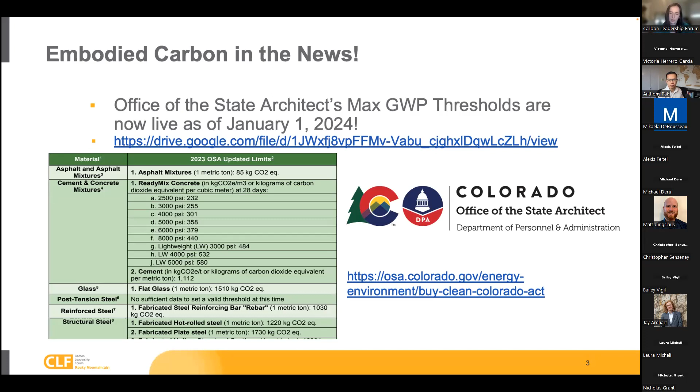So some exciting embodied carbon news in our area. The Office of the State Architect announced on January 1st, 2024, the max global warming potential thresholds. So the Buy Clean Colorado Act applies to state public projects where the project cost exceeds $500,000 and where an agency of government issues a design solicitation on or after January 1st. And so on the left, you can see just a brief snapshot of what the limits thresholds look like. And please use the links provided on this slide to learn more about that.

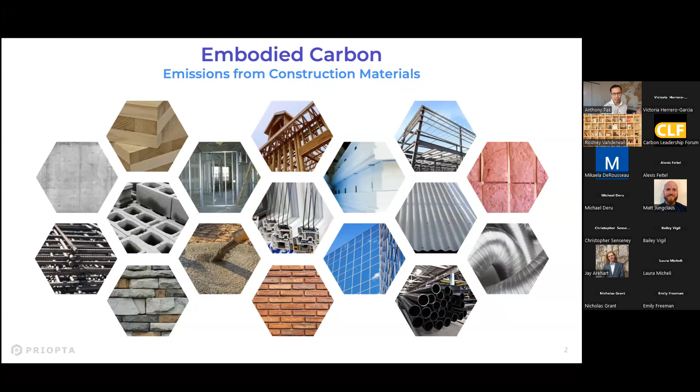Probably most of you are familiar with this, but I just always like to start off with, what is embodied carbon? When we're talking about embodied carbon, we're referring to the emissions associated with construction materials. So all the materials that go into a building or an infrastructure. So things like wood, concrete, glass, steel, the emissions associated with those materials across all the life cycle stages from cradle to grave, so to speak. So everything from raw material extraction, transportation, manufacturing, processing, construction, operation, all the way to end of life for each of those materials.

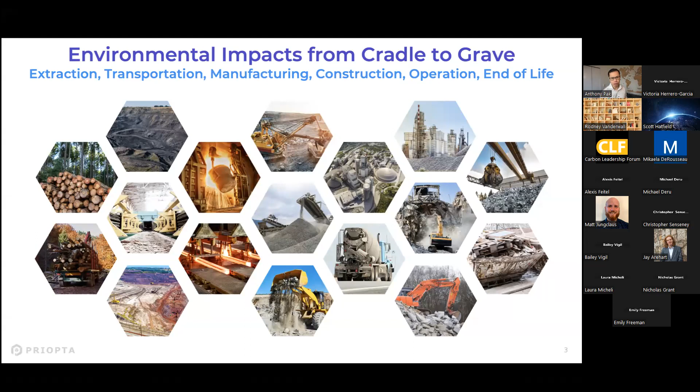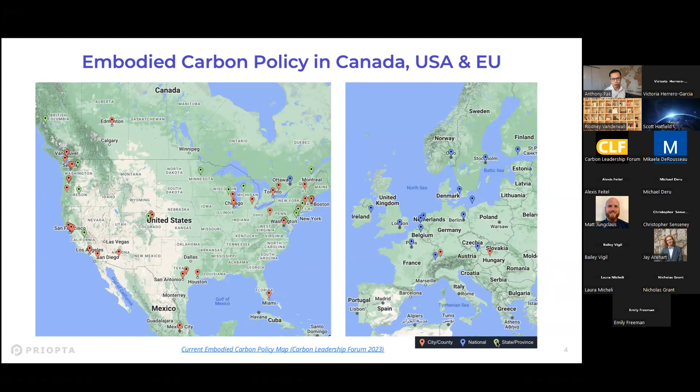In recent years, there's been a lot of interest in embodied carbon from a policy perspective. And so this is a map from the Carbon Leadership Forum that shows you where there are policies and programs addressing embodied carbon, both in North America and also in Europe. So you can kind of see the red dots are the city or municipal level policies, city, county. The blue is national. The green is state and provincial scale. So there's lots of different policies. Just to cover a few of the more prominent examples, the City of Vancouver, which I'll be talking about, we're the first city to put it into the building code. And so I'll obviously be speaking more about that soon.

But also in Canada, the City of Toronto, with their Toronto Green Standard, they have some embodied carbon requirements specifically for municipal buildings. And at a later point, it may apply to more private construction as well, but they've set some upfront embodied carbon limits on that.

At the federal level in Canada, we have the Greening Government strategy from the Treasury Board Secretariat. So this applies to all the federal major new construction projects in Canada. And so currently they have a requirement for a 10% reduction on specifically the concrete for federal projects. And in 2025, they're looking to ramp that up to a 30% reduction in embodied carbon for structural materials, as well as requiring a whole building life cycle assessment disclosure.

At the national level in Canada, there's discussions about putting embodied carbon technical requirements into the national model code in the 2030 code cycle. So in 2030, there's an intention to put embodied carbon into the national code. So that's a fairly significant requirement. But I think right now we're still in the early stages of discussing what those look like.

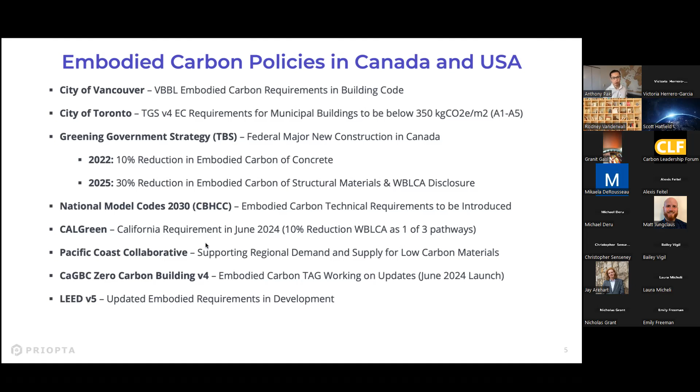So tying back to the City of Vancouver, where did this begin? Well, as of 2017, as part of the City of Vancouver's rezoning requirement, most of the rezoning projects needed to do a whole building life cycle assessment, more just from a reporting perspective. And that was really important to building up industry capacity initially. Rezoning applies to maybe about half of the new construction in the city. So not all the new construction, but still a good chunk of it. And so that really helped to build up the industry capacity to address embodied carbon, to learn about it, and to get used to quantifying this on projects.

And then the city declared a climate emergency and created a Climate Emergency Action Plan. I forget exactly what year it was, maybe 2020 or slightly before then. Within that plan, they defined six big moves, the big areas where we could drive down emissions in the most significant way in the city. And what was notable was that big move number 5 was focused on embodied carbon. At the time, that was a very rare thing to see in climate emergency action plans, or for municipalities to address it, at least in North America.

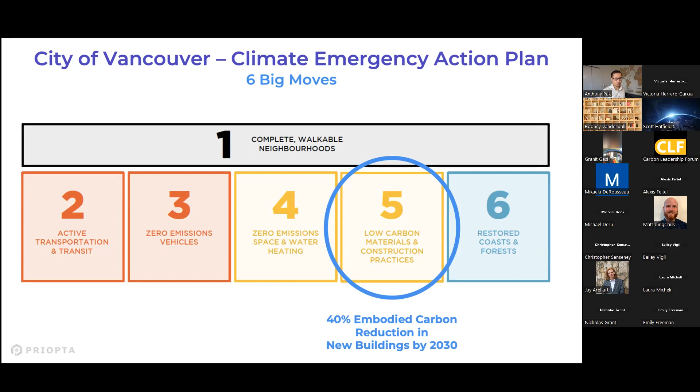And so what they set was that by 2030, they're targeting a 40% reduction in embodied carbon in new buildings, relative to the 2018 baseline. So that's basically where all this policy is moving towards. So what does the roadmap look like right now? As I mentioned earlier, back in 2017, we had the rezoning requirement.

In October 2023, we became the first jurisdiction in North America to put it into the building code, because the City of Vancouver has our own building code, the Vancouver Building Bylaw. This means it applies to all projects applying for building permit that are what we call Part 3 buildings. So they're basically buildings bigger than, let's say, 6,000 square feet, and it excludes one to three storey residential. Anything bigger than that, it applies to those projects in the city.

So as of last October, there was the requirement for reporting, and the embodied carbon on a whole building basis could not be greater than 2x the baseline. So it's got to be less than or equal to 2x the baseline. I'll get more into the specifics of what that means. And then in January 2025, that's when the reduction requirements really start to set in, so between 10 to 20% reduction, depending on the building type.

It's unclear what the interim steps will be between then and 2030, but as you can imagine, it likely will ramp up at some point. And then in 2030, the target is 40% reduction. To get into more of the specifics, so as I mentioned, as of October last year, there's a reporting requirement equal to or less than, and it also needs to be equal to or less than 2x the baseline.

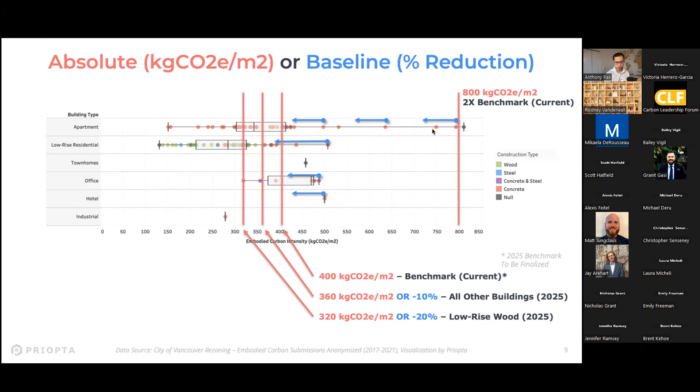So naturally, a lot of questions come into play as to how do you define a baseline and what's included in your study, what building elements are included, et cetera. And so this is where the City of Vancouver's embodied carbon guidelines come into play. And the aim of this guideline is to really address a lot of the potential questions that might come up from a life cycle assessment practitioner as they're doing these types of LCAs.

Historically, there has not been a lot of great guidance, even for LEED projects, like how do you define a baseline? There's a lot of room for interpretation. And so the idea was that we were trying to address a lot of this and give more guidance around how to do this, especially if we're trying to put this into the building code. It's a much higher bar, and I think we need to bring more rigor to this than if it's just kind of a voluntary requirement.

So as I mentioned before, there's an absolute pathway and a baseline pathway. If you go down that baseline pathway of measuring a percent reduction, these guidelines give guidance around that, and some of this guidance will help avoid some of the so-called gaming of the baseline. And then the other thing is, that might include, for example, giving baseline definitions or starting point assumptions that you can use for assemblies or at the material level, even down to what EPDs you should point to when it comes to baseline definition for different materials.

And also giving more details around how do you account for embodied carbon reductions for various different design measures, like what happens when you incorporate reuse or reduce parking, or you reduce the amount of material quantities in your project, or you specify or procure lower carbon materials. How do you quantify that stuff?

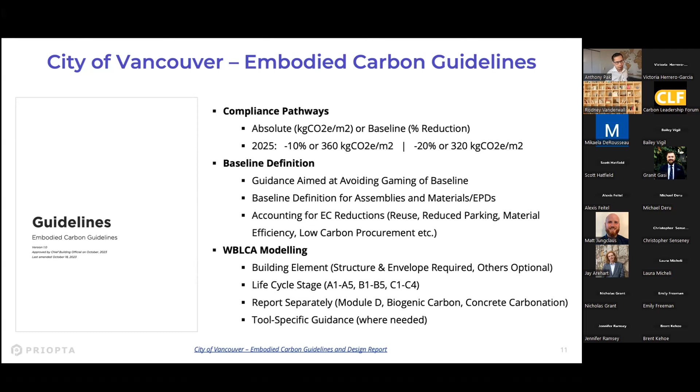So we're looking from module A to module C. I'll speak more about that later. And then special topics like how do you deal with module D or biogenic carbon or concrete carbonation. Basically, those things are reported separately, but they're not rolled up into the main results. And then crucially, there's multiple different software tools out there right now that practitioners will use to do whole building life cycle assessments. So we try to account for some of these tool-specific nuances where needed to give practical guidance around how do you actually comply.

So starting off with the baseline definition, we have this perspective of functional equivalence. So we want to make sure that the baseline definition is functionally equivalent. So when you're defining a hypothetical version of your building, we need to make sure that it's as comparable as possible. And so that means it needs to be able to serve the same type of function. And so we specifically call out three different types of functional equivalence. One is from a thermal perspective.

So let's say you're comparing your baseline versus your proposed design. From a thermal perspective, you want to make sure that they have a functionally equivalent thermal performance. You could approximate this, for example, with clear wall R-value on the walls and roofs. You could also bring it down to a more detailed level if you're doing thermal bridging calculations, although that's not required. You can simplify and use this approximation of clear wall R-values. From a structural perspective, the baseline needs to be functionally equivalent as well.

It doesn't mean that they need to be the same structural system. So for example, you may be designing a mass timber building, but you can compare it against a concrete frame building. And obviously there's going to be differences between those two different structural systems, and they may come with different column spans or different nuances specific to each of those structural frames. But it should reflect what would be typical practice in your baseline definition.

And there is definitely room for professional judgment on this front. However, we do try to provide some clarity on some of these elements where possible to at least guide some of the thinking. But you can account for things if you've made intentional design decisions to make your structure more materially efficient. For example, you change your column spans or you avoid transfer slabs or you design a lighter structure or facade systems, resulting in smaller foundations. Those types of measures you can actually reflect. So it's not saying that you have to have the same material quantities in both the structures.

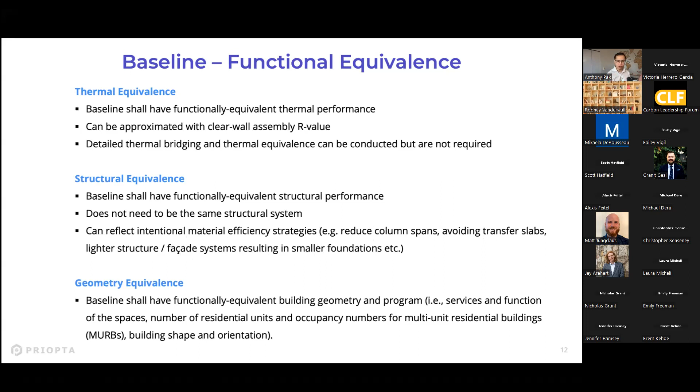From a geometry perspective as well, generally speaking, we want to make sure that the building, the geometry, the program is serving the same purpose. And broadly, there's two main approaches to defining a baseline. One is you can use an earlier design iteration of your modeling. So for example, in the earlier design phase, you're doing a modeling of your project. You can use that compared to a proposed design, maybe in a later stage of design. That's a possibility. And there may be still slight variations between those models. But importantly, you want to address if there's certain elements that were not included in your early design. Let's say, for example, foundation, you need to still account for those things to make sure that they're functionally equivalent.

Or you could use your proposed design as a starting point. I personally prefer this approach. I think this is potentially more accurate and more functionally equivalent: you take a copy of your current proposed design at whatever design stage you're at, use that as a starting point for your baseline definition, and then you basically swap out the materials or the assemblies to reflect typical practice or industry average values that you would use in your baseline definition. This approach is likely to ensure the most functional equivalence between your baseline and proposed scenario, and that it's modeled at a similar level of detail at the given design phase.

As I mentioned, with the guidelines, we try to address some of the tool-specific nuances, which I think is really important because each of these tools have different strengths and weaknesses, and also sometimes different underlying databases that obviously affect the results. Regardless of which tool you use, you have to use the same tool for this analysis. So you can't use a different tool for baseline versus proposed and compare the values. We've designed the guidelines with where these tools are currently at. Now, these tools may change as well. They're definitely evolving, adding new features, adding new updates to the databases. And so we want to have the guidance evolve as these tools evolve. Hopefully this gives some additional clarity.

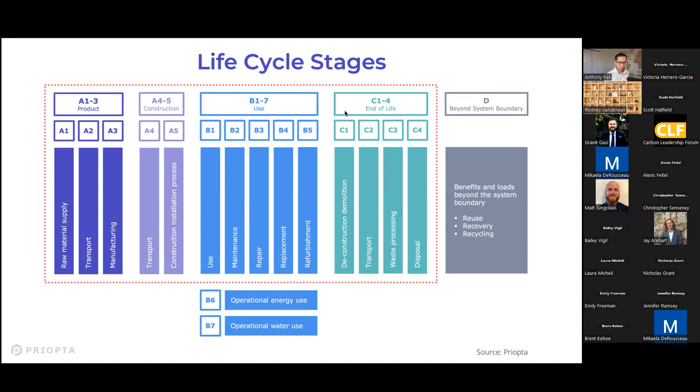And then module B is the use phase, probably the most significant of which is the replacements, so B4. So if there's materials that need to get replaced over a 60-year lifespan of the building, we account for that as well. And then module C is end-of-life emissions. Module D is reported separately. That's benefits and loads beyond the system boundary, so the impacts of reuse and recycling at the end of the project life. I'm mentioning this just to give you a high-level overview because I'm going to be touching on some of the assumptions next.

So, in the whole building LCAs that we're requiring, it's module A to C. Module D is reported separately. For module A1 to A3, you should use industry average EPDs and generic data within tools as a default assumption, and also for your baseline

definition. However, for your proposed design, if you've actually specified it in your project documents, like in your specs or in your drawings, that you are procuring a lower carbon material or from a different manufacturer or whatnot, you can use manufacturer product-specific EPDs in those scenarios to demonstrate further reductions. So let's say you're using some low carbon mixes from your local ready-mix producer, and they are able to generate EPDs, you can actually incorporate those values into your estimates.

And then module A4, so everything from module A4 all the way to module C, you can use the default tool values, or you can modify some of these underlying assumptions if the tool allows for, if you do have higher quality project-specific or regionally specific data. And if you modify any of these assumptions, you need to include this in the design report, which is kind of the Excel submission template.

I think this is probably one of the more innovative things that we've done. And it's more to address where there's currently a gap in the market. So if a certain software tool that you're using is missing life cycle stages, because we're requiring from module A to C, for example, EC3 as a database, or the Tally CAT tool, which is built off of EC3, or any number of other tools built off of EC3, they currently only have A1 to A3 values. And so you can use those tools.

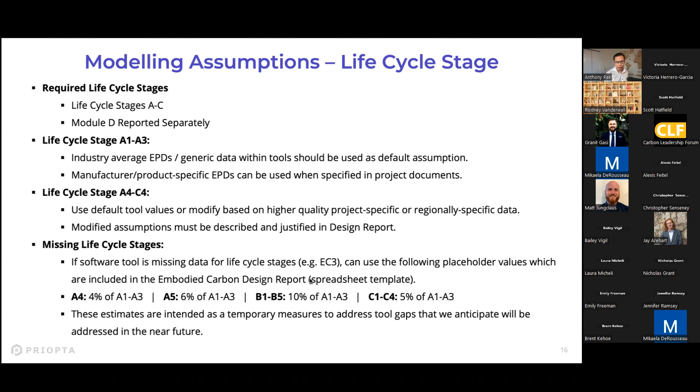But they're meant as temporary measures to address these gaps in the tools, because we didn't want to exclude EC3 because there's a lot of low carbon procurement options and manufacturer specific data points in that tool as well, which can be really valuable. And then some other modeling assumptions, we're looking at a building lifespan of 60 years. You can use software defaults, or you can override some of the software defaults with some of the values that we have in the appendices.

Biogenic carbon storage, as well as naturally occurring concrete carbonation, and land use change. Those emissions, if they are quantified at all, they can be quantified, but they should be reported separately and not included in the main calculation. We ask questions like, what's the bill of material source? How did you calculate those material quantities? Is it from a Revit model, like a BIM model, a cost estimate, and or takeoffs from PDF drawings, for example?

And then we also define what elements. We give a really detailed list in the appendices with tables on what elements specifically should be included, which ones are optional, and which ones should be excluded. And it's down to the building element classification system from OmniClass, down to level 4, which is very, very detailed. And I think it's really helpful to have this level of clarity because sometimes it's not entirely clear what elements should be included or not when you say something like, you should just look at the structure and envelope, for example, because there's a lot of nuanced decisions that we need to address. And so that can give some additional guidance on that.

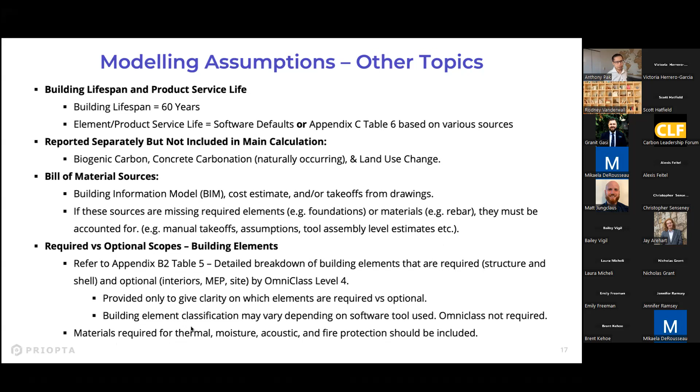Broadly speaking, the materials required for both the structure and envelope also need to be able to satisfy the thermal, moisture, acoustic, and fire protection related requirements. So I'm not going to get too in depth into all the specific assumptions, but I just want to give you a flavor of what some of the information is in these embodied carbon guidelines.

I should mention that the embodied carbon guidelines, even though this pertains specifically to the City of Vancouver, I know many other jurisdictions are currently looking at these guidelines as a source of inspiration. They may potentially even refer to this. I think there's a conversation right now in Canada at the national level to look at how to build upon these guidelines to turn this into more national guidance in Canada. And I know there's certain other jurisdictions in the US as well that are taking a look at these guidelines because they're probably the most detailed, at least from a practical policy implementation perspective.

But yeah, I just wanted to kind of mention that just to frame it a bit. And not to say that these guidelines are perfect, but I think it's very much a work in progress right now. But yeah.

So some of the other things that you'll find in these guidelines is having some starting point assumptions by building element. So when you're defining a baseline building, what assumptions should you make for your foundations or for your floors or for long span roofs or short span roofs or exterior walls for different types of buildings or windows or interior partitions. So we kind of give you some starting point assumptions.

That's not to say that this should be the baseline definition for every single building. Again, there's always professional judgment involved, but the intention is we're trying to reflect what would be typical practice for this type of building, for this building element, for a typical building that would be built in this region. So this hopefully gives some starting point assumptions, like what type of insulation to assume in the cavity, or what type of continuous insulation should we assume for the exterior walls, et cetera.

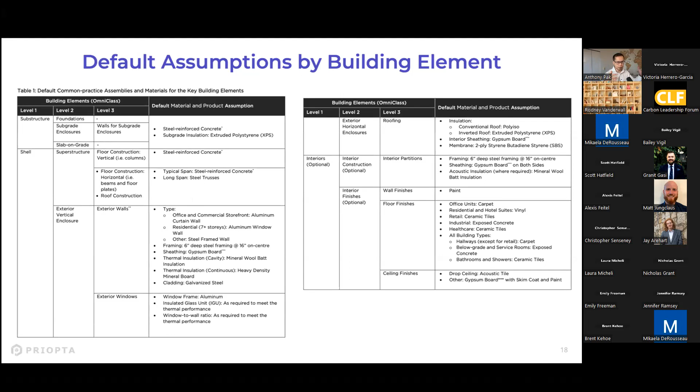But what about the individual materials? So for many of the key material categories, we also give some guidance. So for example, concrete, obviously a very important factor. We talk about which industry average data point to refer to. So in Canada, we actually have provincially specific industry average values. So each province has their own industry average EPD for concrete, for each strength of concrete, and there's many different mixes in there, but for each strength, there's a different baseline mix. And so that's going to be the thing that you use as an assumption for your baseline definition.

Obviously, in your proposed design, if you show lower carbon options, you can reflect that. But giving details as to air entrained or not air entrained concrete, or what strengths of concrete to assume, especially in the earlier design stage, not so much in building permit, but let's say you're in the rezoning stage and you don't know the strengths of concrete, it's not specified on the drawings, we can give you some starting point assumptions as well. And then we have some tool specific nuances because some of these data points do not exist in certain tools. And so we address that as well in blue boxes.

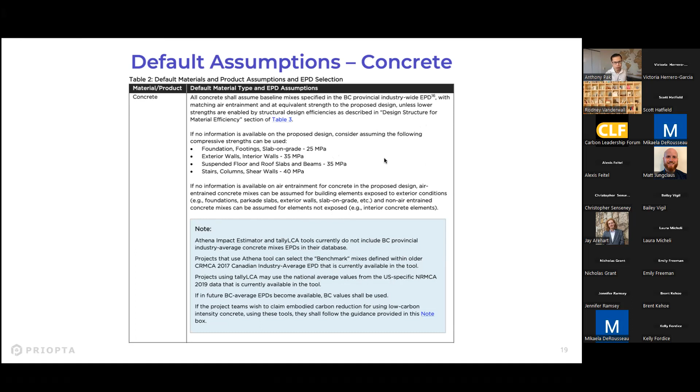Insulation, for example, we call out some specific topics like XPS insulation. XPS has big differences between underlying assumptions if you use HFC blowing agents versus HFO blowing agents. HFC is hydrofluorocarbons, which is basically like refrigerants, and they have very high global warming potential. And basically their results can be 10 to 25x higher than the new versions of HFO-based XPS insulation. And so we specifically call out what assumptions to use for baseline for both XPS as well as spray foam insulation.

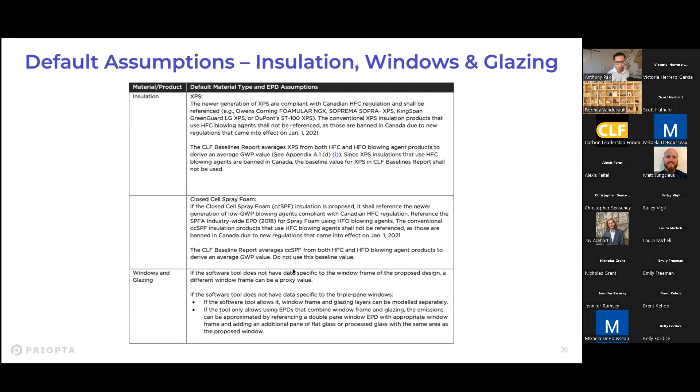And then rebar, some special topics like how do you address post-tension slabs and post-tension tendons, where there's oftentimes not data points, at least within certain tools, and how would you quantify that? So I mentioned there's assembly level assumptions, there's material specific assumptions, and then we also have a section talking about how you handle special topics for how you might quantify reductions in embodied carbon.

So for example, one potential strategy is that you want to reduce the amount of underground parking. And in doing that, we actually give specific methods for how you would actually quantify that. Let's say there's certain parking minimums set by the city, but I think the city is actually looking at relaxing some of those requirements or removing them. And so, how can you demonstrate that you've intentionally reduced the amount of parking required for this project? There's different strategies for stuff like that.

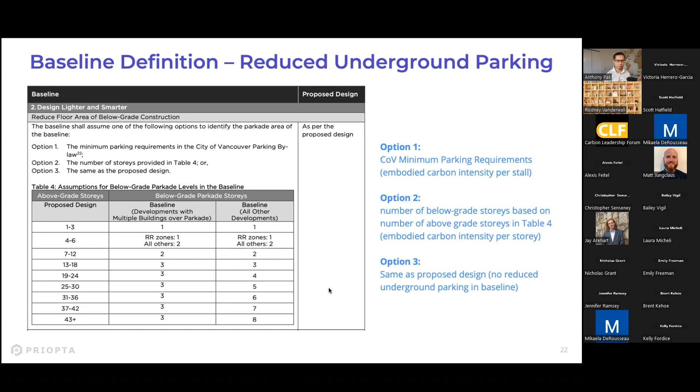We also give some clarity around how do you account for structural material efficiency savings? So if you design your structure in a way that's more materially efficient, what things can you account for and how much do you do that between your baseline and proposed scenario? So we address some of those points.

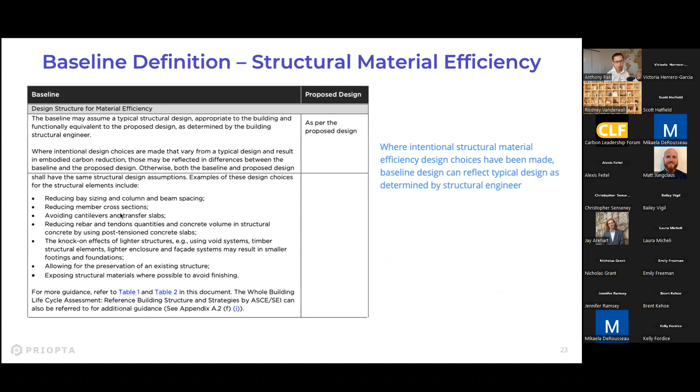So yeah, that's kind of an overview of the guidelines, which detail a lot of the assumptions that you use. In addition to the guidelines, there's also the City of Vancouver's Embodied Carbon Design Report. The design report is basically a spreadsheet submission template that collects some of the project-specific data.

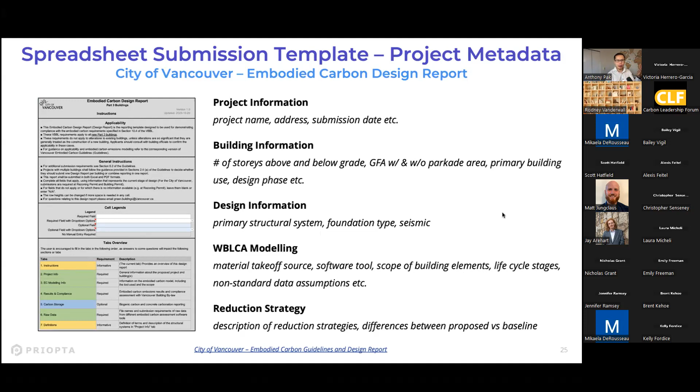So this is the metadata around both the project and also the whole building LCA modeling that went into that project. So we collect this submission template. And then we also collect the raw granular data as natively exported from the different software tools. Athena, Tally, One Click LCA, EC3, they all can spit out results in a more granular fashion. And so we request that raw data as well, which often includes material quantities as well as the GWP, or the embodied carbon, of different material categories.

And within that spreadsheet submission template, we have a link to a page where I've embedded video tutorials for how specifically to export the results in exactly the format that the city would want to receive it. And the reason why I'm bringing this up is that I think this is actually critical from a policy perspective.

There's a lot of discussion around how to harmonize and align methodology. And at the whole building level, I think it's really important that we start collecting this raw data as exported from the different tools, as well as standardizing on a submission template. This enables really robust benchmarking of the projects, and it'll also allow for quality assurance checks on the results, rather than having practitioners just share the rolled up results, like what's the total embodied carbon of this whole project.

If you just get that flat rolled up value, it's really hard to figure out what went into it and how comparable these results are with other results. So setting up a good foundation for this is really important. And if there's one key takeaway message for all of you as you're thinking about how to potentially implement policy in Denver and in the wider region, or wherever you're based, it's that oftentimes you need to start with disclosure, right? You start with whole building life cycle assessment disclosure.